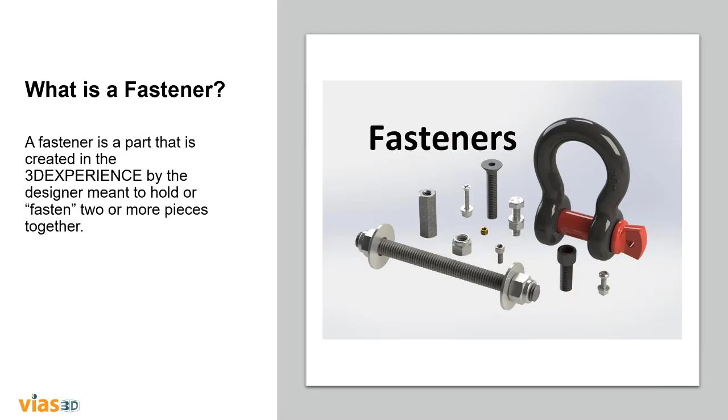As you can see, we have a set of bolts, screws, nuts, but we can have also rivets, and going further than that, we can have, for example, welds, adhesives, and different kinds of elements that join these 2 elements together. So let's take a look at what we can achieve on the 3D Experience by using fasteners. So first of all, we will use an application which is dedicated to design the fasteners across all industries.

It supports the modelization of different types of fasteners. As you can see, we can have single fasteners, a bundle of fasteners, and we can have bead fasteners. The technological view of fasteners can be defined to specify if the fastener is based on welds, bolts, modeling, etc.

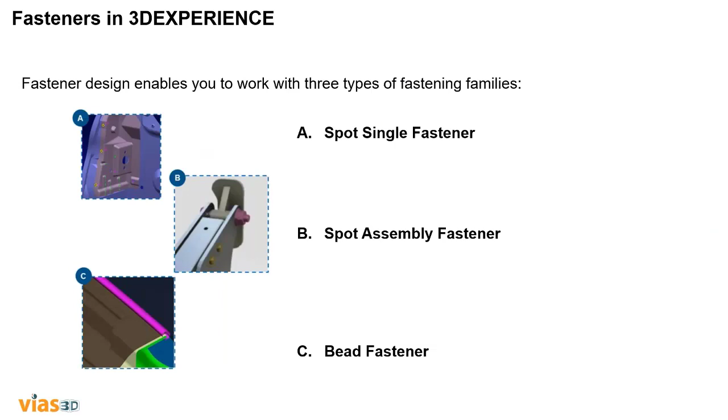Now, fastener design enables us to work with 3 types of fastening families. A single fastener that we call spot. This represents a single spot fastener. You can associate various fastening processes such as weld, adhesive, sealant, rivet, bolts, and clinch with these fasteners.

Okay, then we can have a set of fasteners, which is an assembly. This represents either an assembly of a bolt and a nut or a rivet, and you can control the shape of this fastener and all the fasteners together. A very important thing is the kind of geometry that we will use to create this assembly of fasteners, and that would be the skeleton, which is a wireframe geometry that could be a set of points in which we want to define our fasteners, or it could be a curve along which we want to create the fastener.

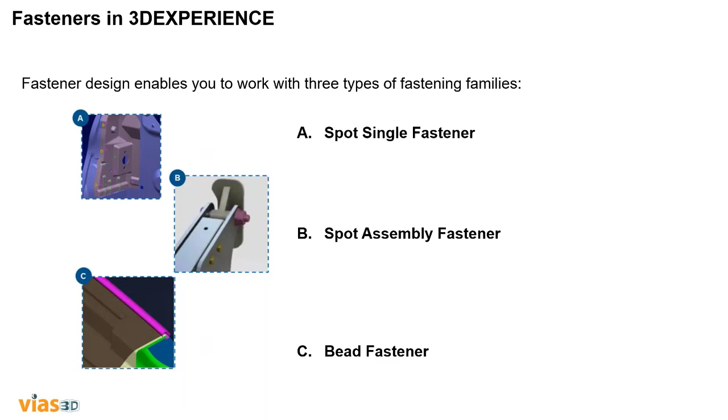And finally, we will have the bead fastener. This represents associating various fastening processes such as weld, adhesive, and sealant with this fastener. So this is what we can represent. For this, we will use a curve or a geometry, and we will put this fastener along it. Okay, so I will continue to a video.

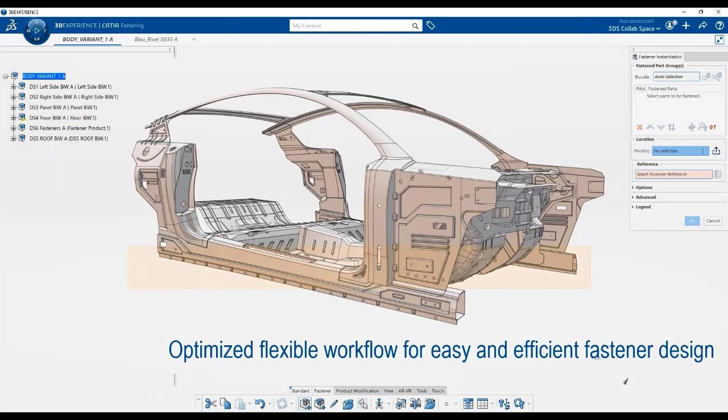Let me explain to you what we can achieve using the CATIA application, CATIA Fastening, inside the body fastener designer role, which is the one for transportation and mobility. So we can optimize a flexible workflow to easily define a set of fasteners. What you can see is that we got the skeleton defined, and we got the 3D parts that we may have from sheet metal design, or if you're working in a different industry, it may be composites, right?

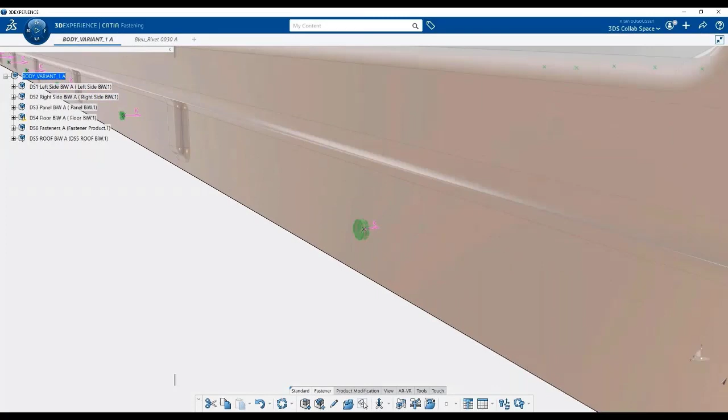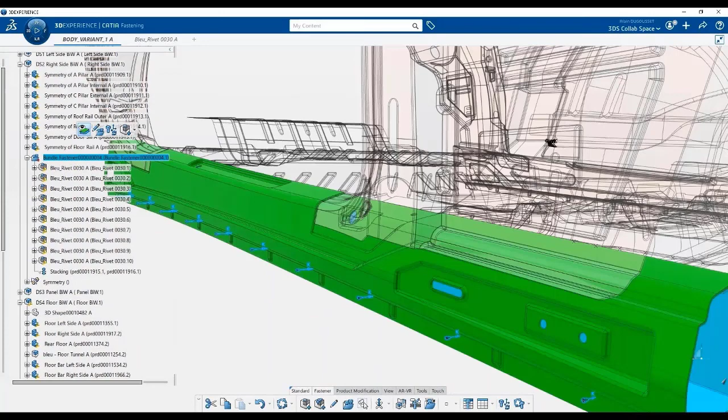So what we do is select this set of points, and we will get something called the key vector. The key vector is a vector that defines the position of the fastener. So we can go from a unitary fastener defined in a catalog to create this bundle of fasteners and position them automatically on our assembly. You can see how the parts involved will be used to define this set of fasteners.

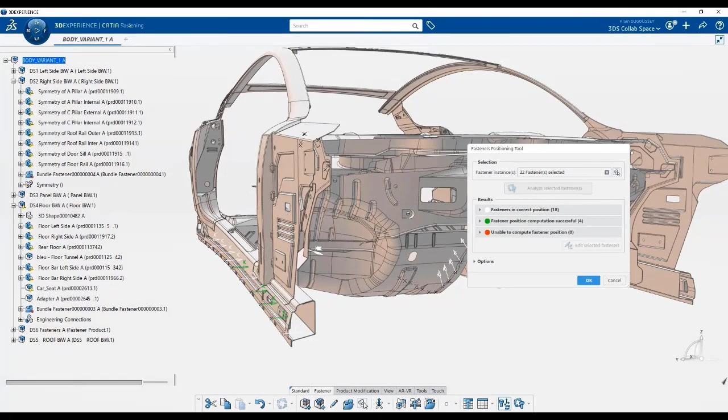We can then stack different kinds of fasteners from a catalog, and that's very important because that allows us to reuse the data. And finally, once we select that fastener from the catalog, what we will do is create all the entities into a single bundle on our operations tree. So that will be able to be handled very easily and very quickly.

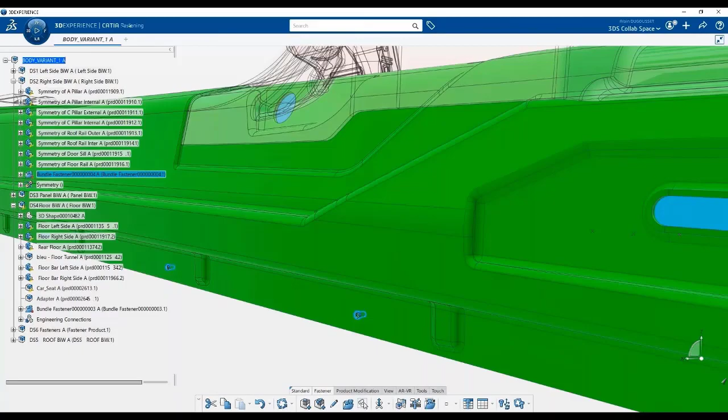You can see this process. What we are doing right now is positioning these fasteners on the right view. We select the parts involved. We got two for this case, the one in blue and the one in green. Okay, let me show you a different example now for a different industry. This one is the fastener designer role inside CATIA, but applied to the industrial equipment industry. Okay, so let's play this.

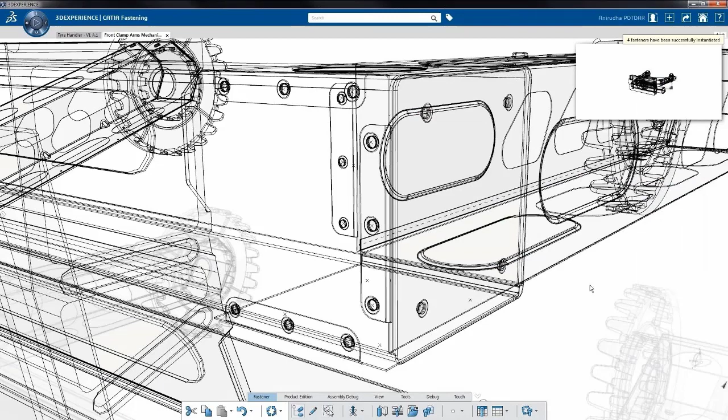Okay, so you may remember this example that we got in one of our previous classes. What we are doing here is positioning rivets on our sheet metal design, and this is a spot fastener. Okay, then what we do is select that spot fastener. All the characteristics may be in the catalog that we previously defined. So in this case, we will position these rivets.

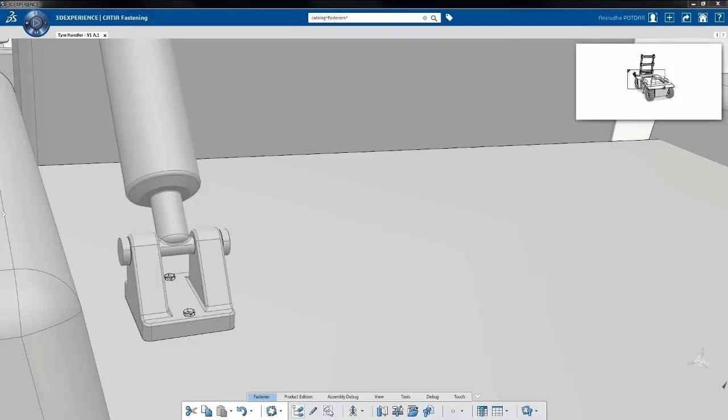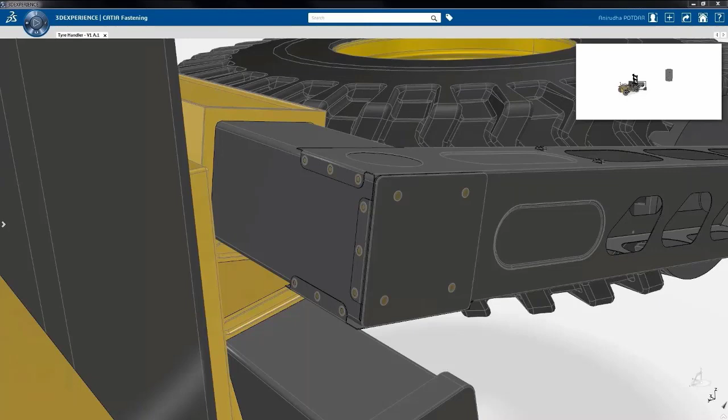And a very important thing is that we can position them by applying a set of rules. For example, in this case, this is a bolt. If you want to apply these fasteners along a curve, you can define the minimum distance between them or the maximum distance between them. And once you have instantiated all the objects in the design view, you can quickly generate reports. So that's a powerful tool that will give us all the information about the fasteners that we are creating in the 3D model. Okay, so I think that's it for the designer role.

Let me talk a little bit about the workflow example, how we can achieve this and how it can be integrated into your design process. So we've got several options. We can start from a legacy software such as CATIA V5.

We will have the root CATProduct, and that means we will have the 3D CATParts, which is all the structure, all the parts created, and then we will have our skeleton. That's important. That's the wireframe geometry that we will use to position all the fasteners. Okay, so we will usually come from composite design or sheet metal products.

Then we can import that native data. It could be V5, for example. This CATProduct, CATPart, we can import into the fasteners database in the 3DEXPERIENCE. Okay. Then using the fastener apps, we can create a template of flexible fasteners. That means we can create several bundles of fasteners to select among all the ones that we are using in one program, for example, and they will be adapted for stacking.

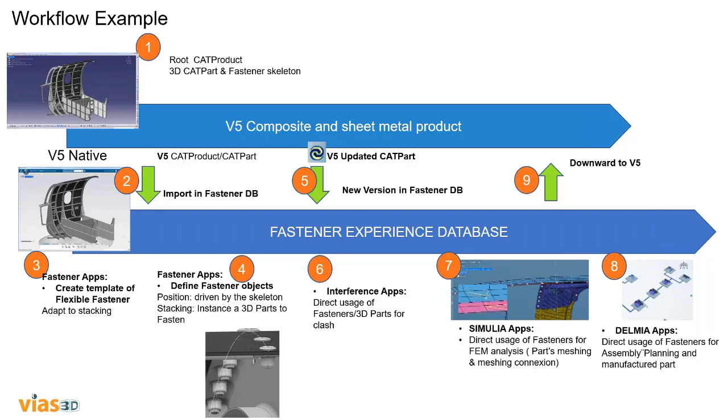Okay, great. And with that, we'll hand it over to Roberto. Roberto? Thank you, Adrian. Thank you, Glenn. Next slide, please, Adrian. Before we start the video, I just would like to make some comments before we go through the workflow.

So what Adrian just explained to us is more related to managing the product structure and the design aspect. And at some point, we might need to perform simulations, right? And the way we do the fastener installments will have a lot of impact on the structure behavior. So when we perform simulations with large assemblies, sometimes in the simulation domain, instantiating fasteners could be a tedious task.

So this fastener application from CATIA makes, I would say, the simulation analyst's life easier, because the simulation model can gather the fastener information from the product structure and create the necessary connections automatically with very minimal user intervention. Okay, so what we will see in this workflow is how simulation analysts and also non-simulation experts can perform simulations reusing the fastener data. So Adrian, can we start the video?

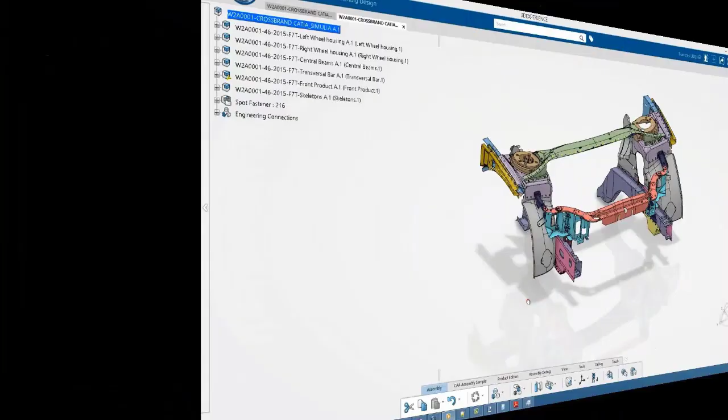Okay, so this is a workflow showing the collaboration between CATIA and SIMULIA applications. So the first step in this workflow will be the flexible fasteners installment on the product structure. At this point, the user is just defining the type of fasteners that will be instantiated in the assembly. By doing this task, the simulation model will be able to read what we're doing here and make the necessary connections for the simulation.

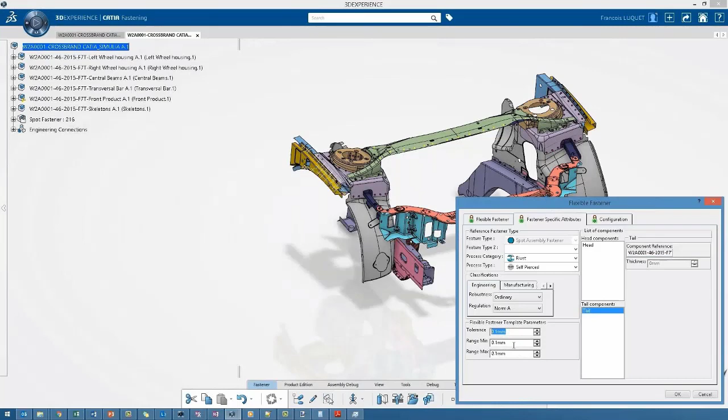In that way, our simulation model will better represent the real conditions of, in this case, the assembly for the transportation and mobility industry. So after doing this, the first step will be creating the simulation model that will represent the assembly. The first step will be creating some meshing rules.

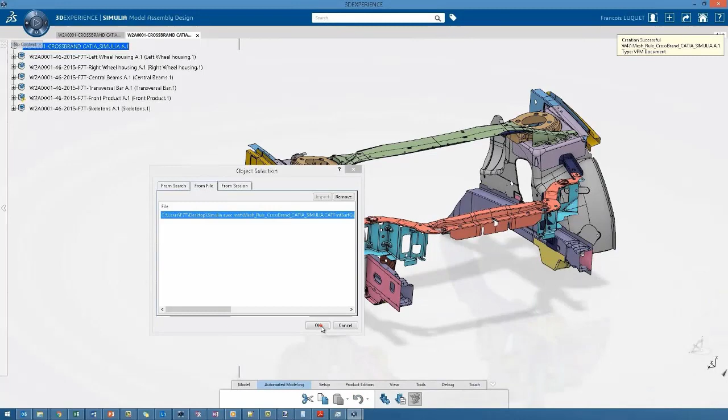Meshing rules is just about defining the meshing criteria to have a high quality finite element model. Meshing rules is just a set of, I would say, conditions that will measure the element quality. One of the main goals of using these meshing rules is because we are going to generate the entire finite element model of this assembly automatically with minimal user intervention.

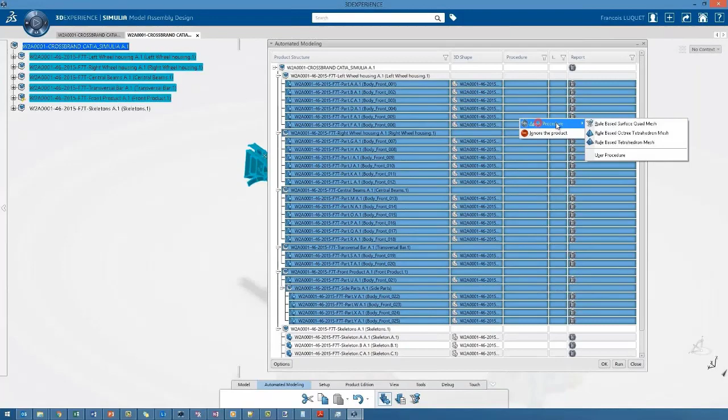So in order to do this, we have to tell the Simulia application under which conditions the application will build the mesh of the entire assembly. Right now, we're just defining to which components the meshing rules will apply. We're just defining the meshing rule definition and also

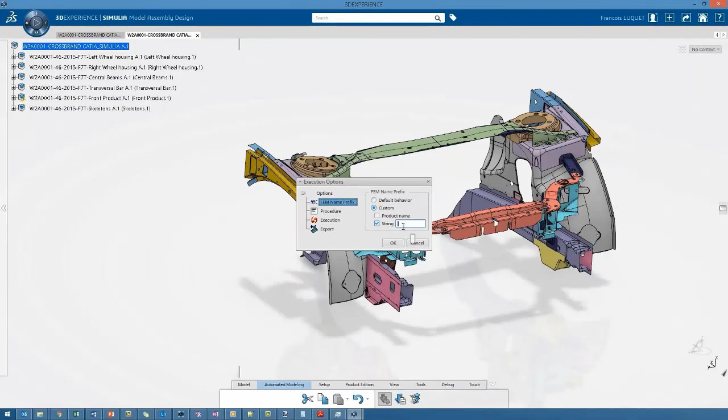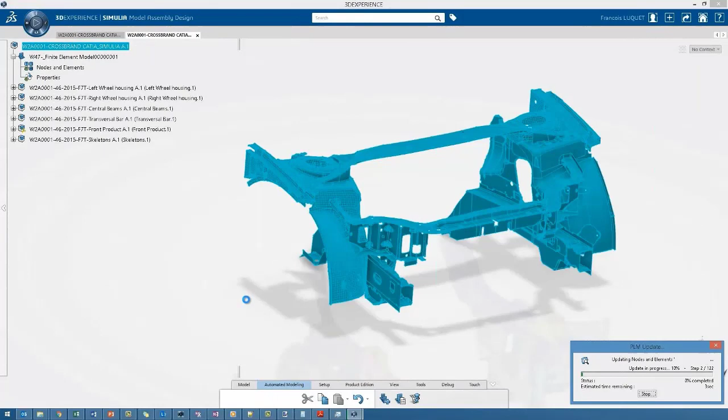how the execution will be performed, because this will mesh automatically the entire assembly, and we can also use hardware resources, not just our computer, but also remote hardware. That's also possible, and we can also define the number of threads available in the hardware to automatically create the mesh. After doing this, we just have to update the product structure, and the simulation model will be created automatically. As you can see, the meshes are being created automatically.

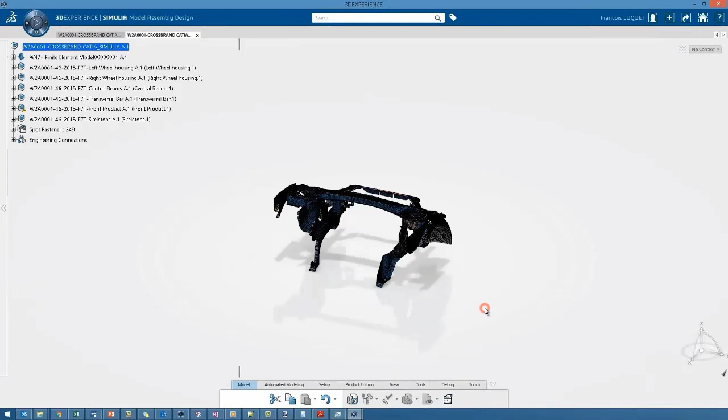So right now, we just have the FEA model defined under the product structure. We're just visualizing the shell mesh that has been created. Next step will be reusing the previously defined fastener data, so the finite element model will be able to read it and create the necessary connections automatically.

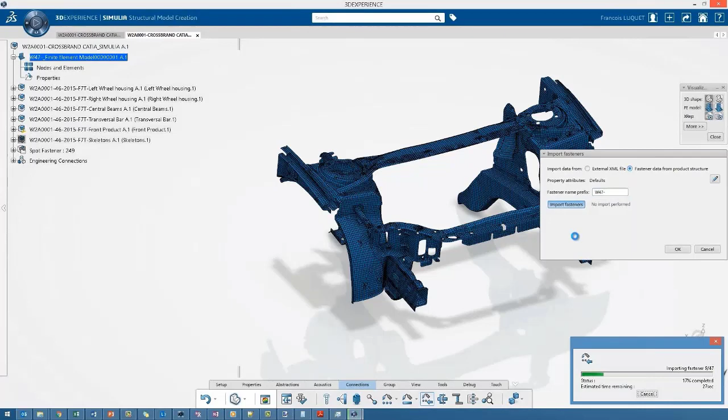So right now we're under the Simulia app, and we're just selecting the import fasteners command and reading the fastener data from the product structure. And as you can see, all the yellow points that we're looking at are coming from the fastener data created from the fastener application. In this way, we're defining the

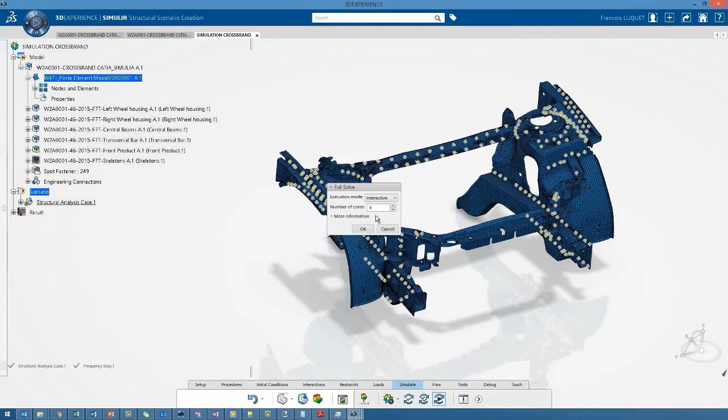connections in the finite element model, and we will run an example frequency simulation considering these connections. During this workflow, we will explore different configurations of this simulation, and we will be basically changing the fastener data to see the effect of this data in the simulation results. So after performing the frequency simulation, we will be able to see the mode shapes

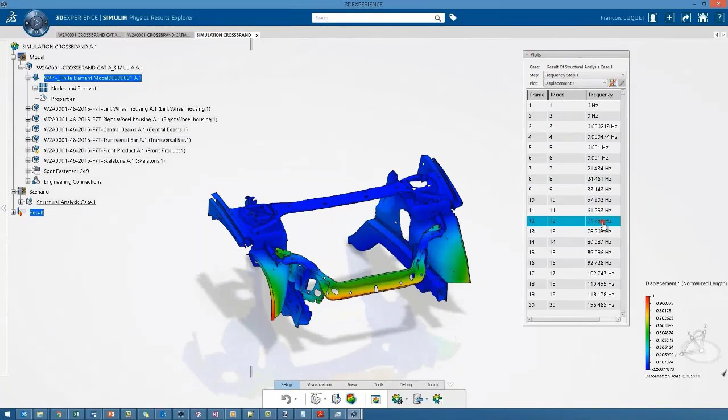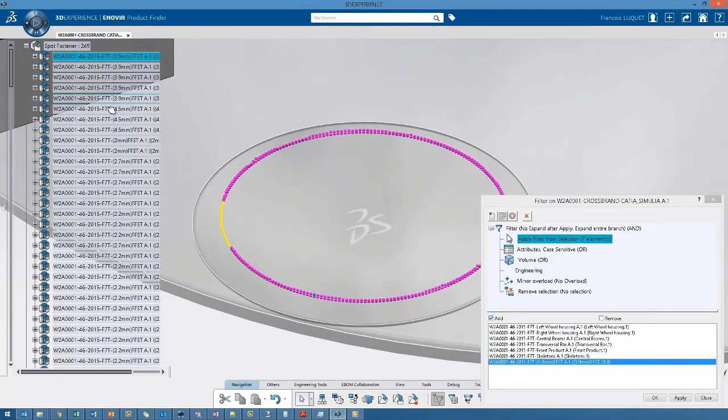at different frequency levels. And by seeing these results, we can see that at some frequency levels, the structure is having some unexpected deformations, and this is due to the lack of fasteners. So very easily, we can go back to the product structure, edit our fastener data, update the simulation model and rerun the simulation again, with no manual user intervention to define the fastener position at the simulation level.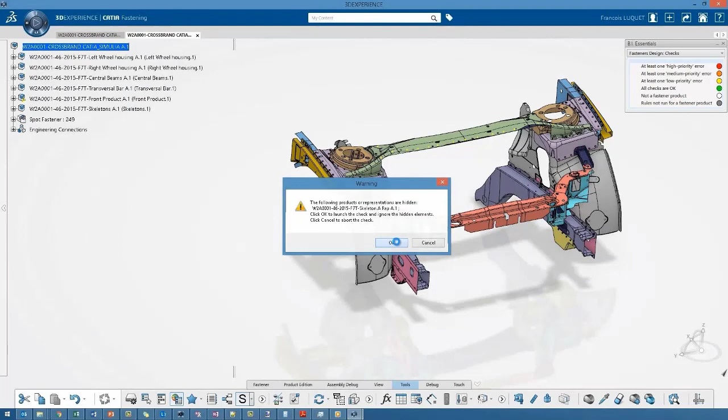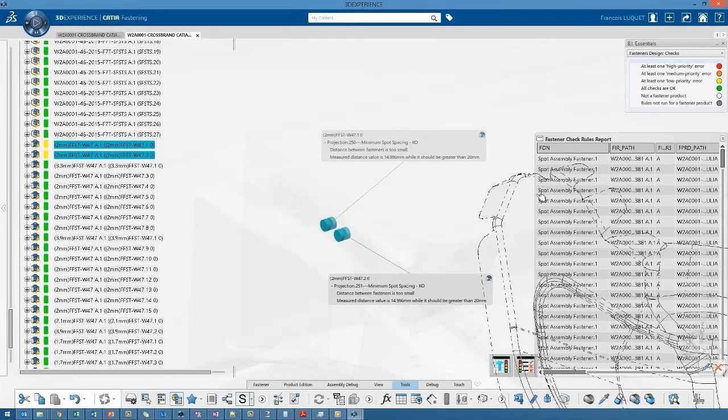So in this case, the first thing we're going to do is diagnose the fastener data. I think Adrian mentioned before, we can define the minimum distance between fasteners, and if we are not fulfilling these conditions, the fastener data will not be read in the simulation model. So in this example, we are not in compliance with this. These fasteners are very close. So the user will just modify the distance between these two fasteners.

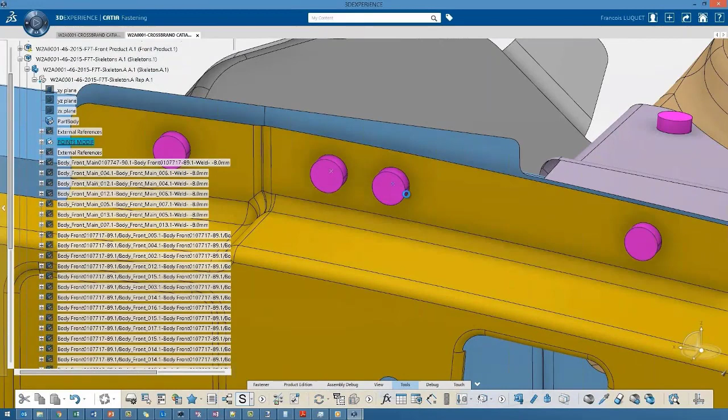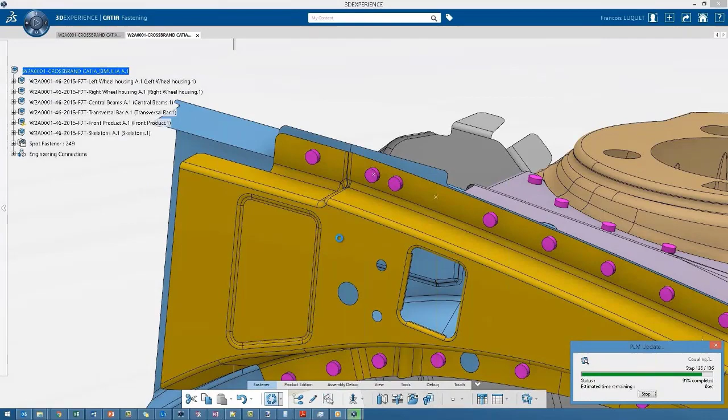We just have to go to the wired data that Adrian just explained to us. We will measure the distance in this wired data, and just by modifying the distance, the fastener data from the product structure will be automatically updated, and so will the simulation model. By working in this 3DEXPERIENCE environment, this allows us to work with real-time data using PLM objects. So after updating the fastener data, we just have to go back and update the simulation model using the new fastener data.

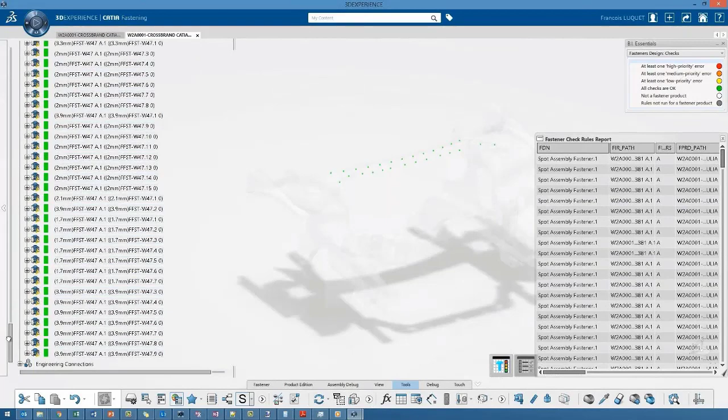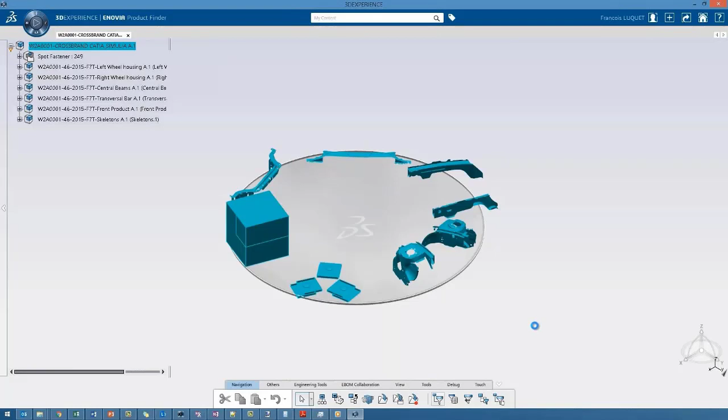With the update, we're just checking the new fastener data, and the green color next to every fastener means that they are okay with the fastener installation conditions. So right now we're just saving the model, and we will go back to the simulation model, update it, and the new connector will be automatically placed in the assembly.

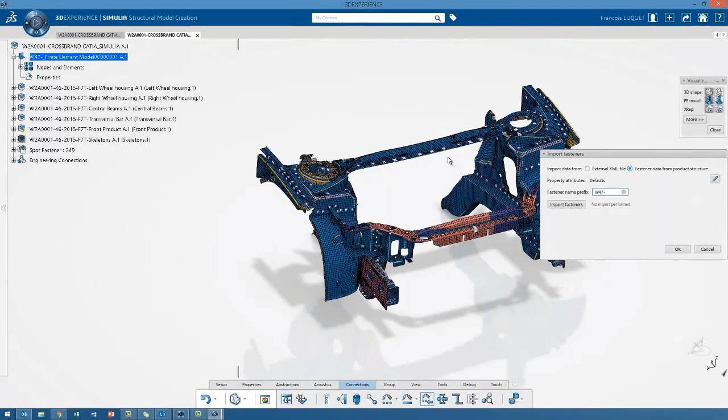Okay. We just have to perform the update, and we will see in the left side of the assembly the two connectors very close to each other. We just have to update the new fastener data, as you can see here. We import the fasteners again, perform the update in the simulation model, and you'll see that now these two connectors are positioned as expected. And then we can just rerun the same simulation again.

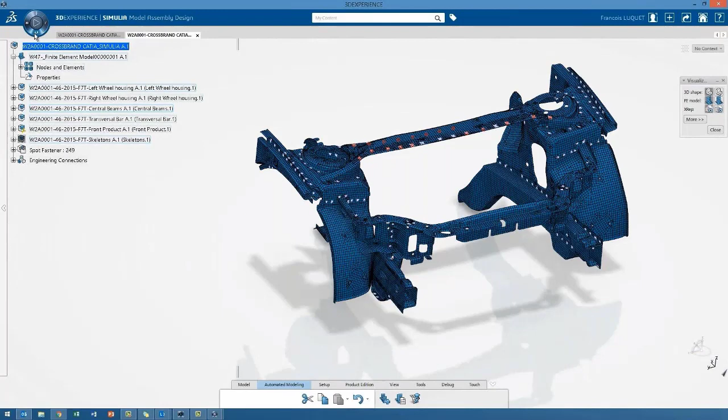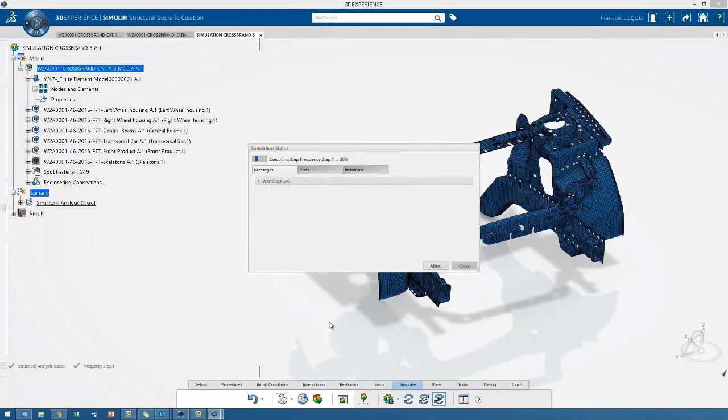As you can see, until now, there is no manual definition of connectors. Of course, that can be done, but when we're working with these large assemblies, it could be a very time-consuming task. So by using the product structure data, we can really save a lot of time. Right now, we're just running the simulation again. And after running the simulation, we will again check the frequency levels at different deformed shapes.

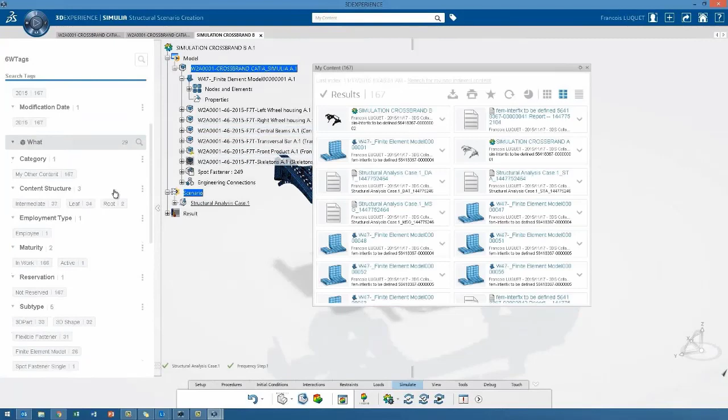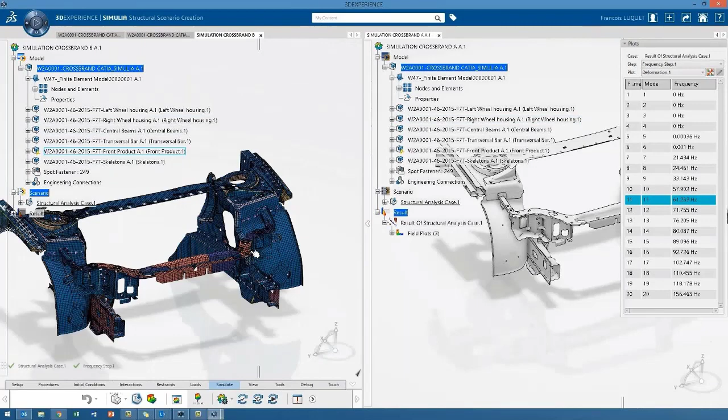We'll still have some undesired deformation on this model. We will go back to the product structure data and perform the necessary changes to the fasteners. Before we go to that step, we will just make a comparison between the previous simulation and the new simulation. In this way, we will be able to see how the new fastener data is impacting the simulation results.

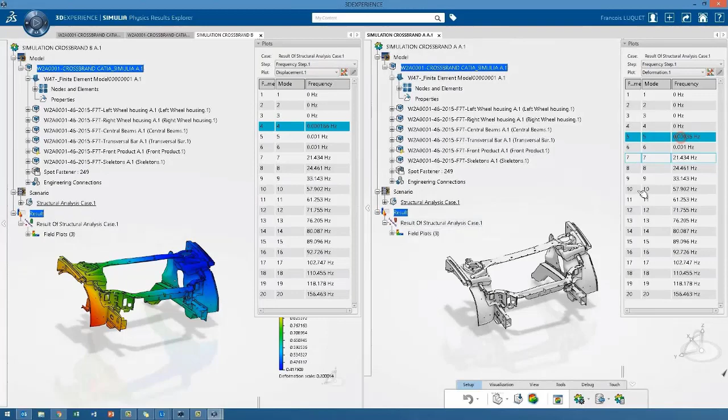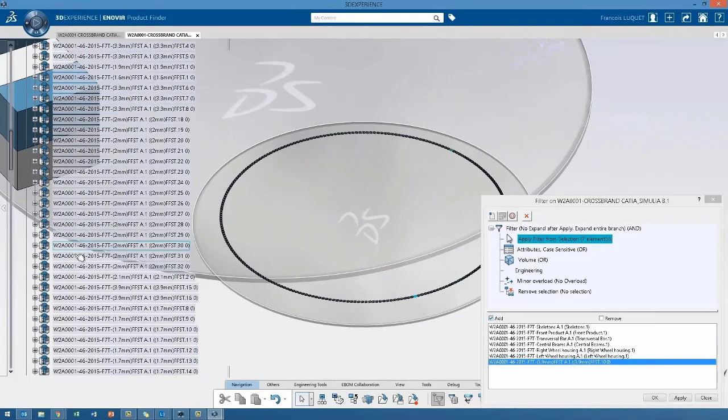As we can see in the different models, there is a minimal impact of the new fastener position on the frequency levels. We have basically the same frequency at the same mode numbers. So this means we still have to do corrections to the connections. Instead of manually editing the connections on the simulation model, which of course can be done, in order to keep the product structure data updated, we will go back to the fasteners design and perform the necessary changes.

Right now, we will be using a new set of fasteners, and we'll apply this to the product structure. We will include a different set of fasteners in different regions. Right now, we're just opening the new fastener data. We just have to open this at the simulation model level, perform the necessary updates, and the model will be ready for the next simulation.

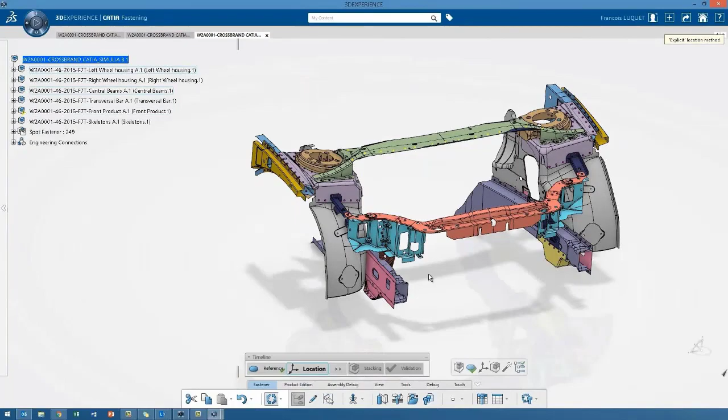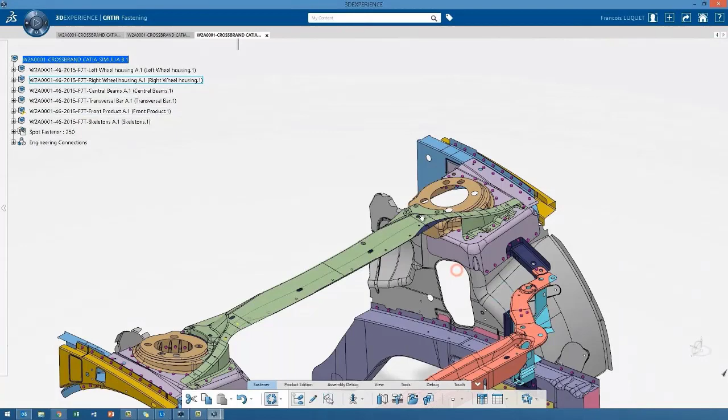So we will include a new couple of fasteners in these regions. As you can see here, we're just placing the wireframe data and including the new fastener here. The same will be done on the right side of the model. A new fastener will be placed here just by selecting and defining the new wireframe data. We're okay with this new fastener.

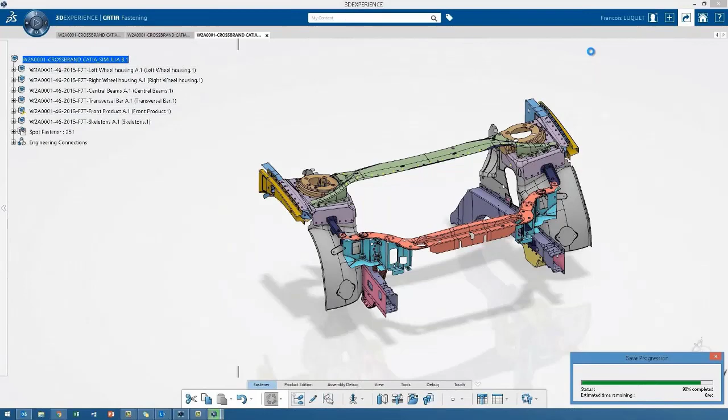And the next step will be, we will just need to update the product structure and go back to the simulation. The simulation model will be able to update and read the new fastener data, and the connections will be there, ready for the new simulation.

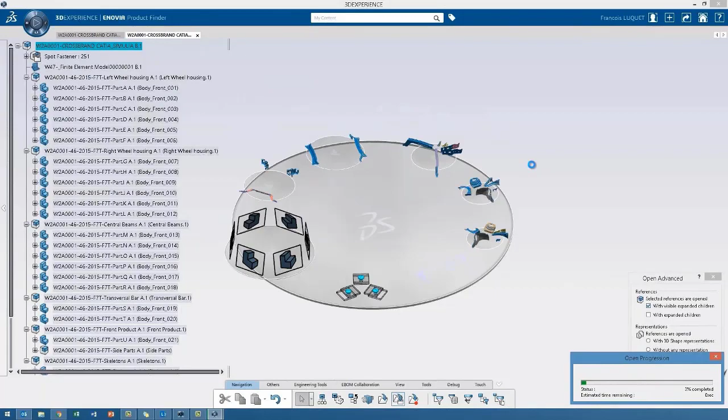Adrian, can you help me just moving forward the video? Like, no, just a couple minutes.

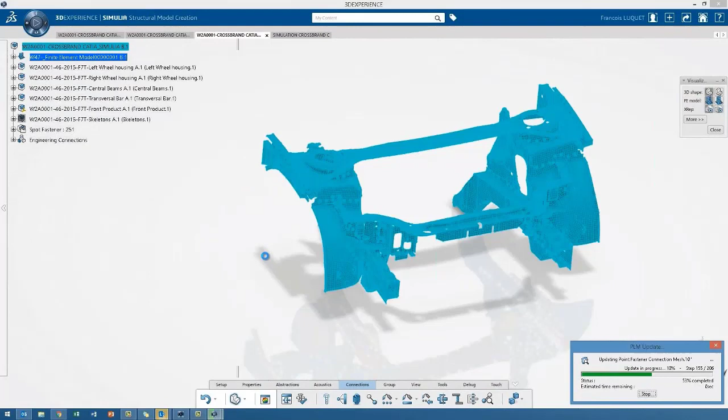Yeah, that's okay. Okay, so now as you can see, there is the new fastener data in the simulation model where we just read the new fasteners. And by just updating the structure, I think I've said this many times now, we can run the simulation again. After doing these steps, we compare the new simulation results, and in this way we will be able to measure the impact of these new fasteners on the mode shape.

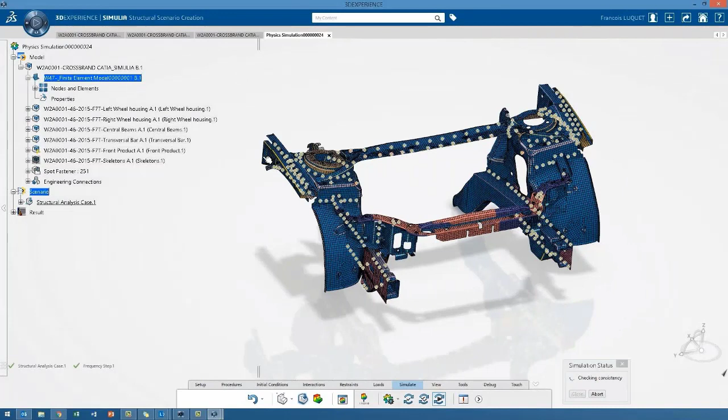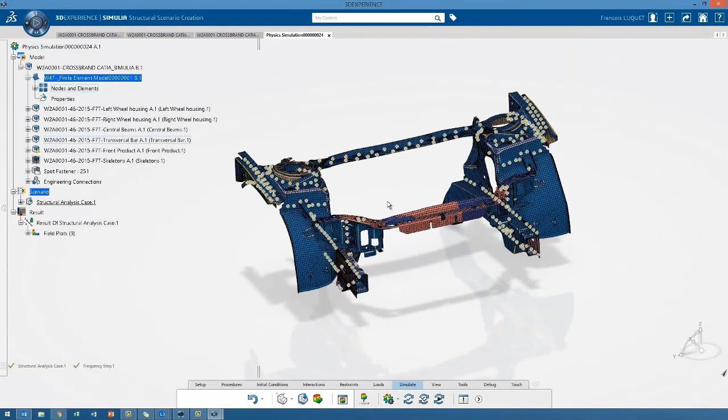We just define a new frequency response analysis, 20 modes, defining the number of cores to be used. Now we have the results. We're just looking at the new frequency levels at different deformed shapes. As you can see until now, it is very easy to use updated fastener data on this. The same will happen if we perform changes to the CAD. The focus today is the fastener data.

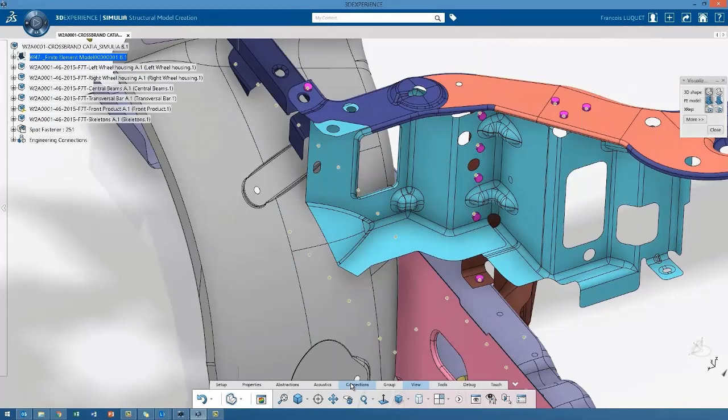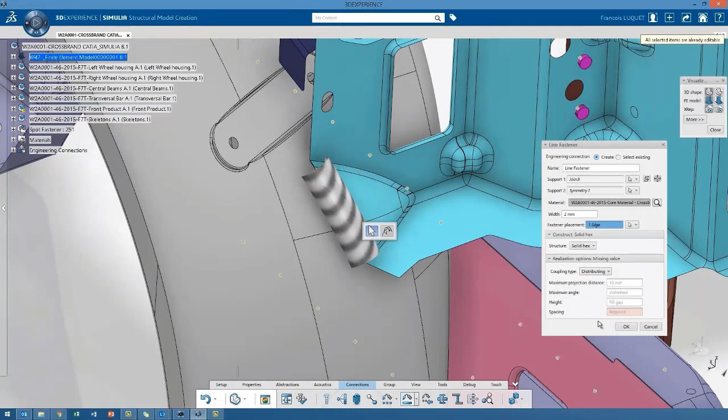And now we will use a different example: not just point fasteners, we will use line fasteners. So in this case, we are representing some kind of seam welds. We can define the type of material to be used in this seam weld, the size, and which kind of elements we want to use for the simulation model. This is at the fastener data level. After defining these new fasteners, the simulation model will update automatically.

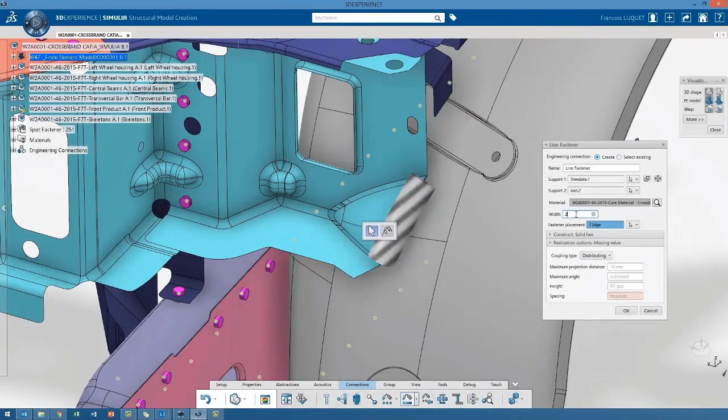We'll see here, we're just defining the new material, the size of the bead fastener, and the spacing that will be used here. After doing this, we just go back to the simulation model, update the simulation model, and now the bead fastener is well represented here.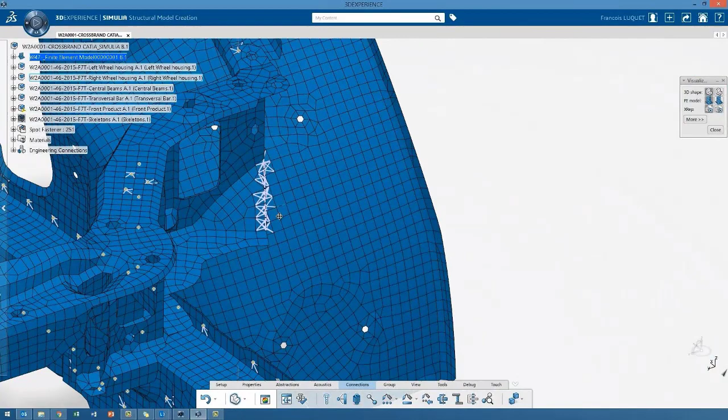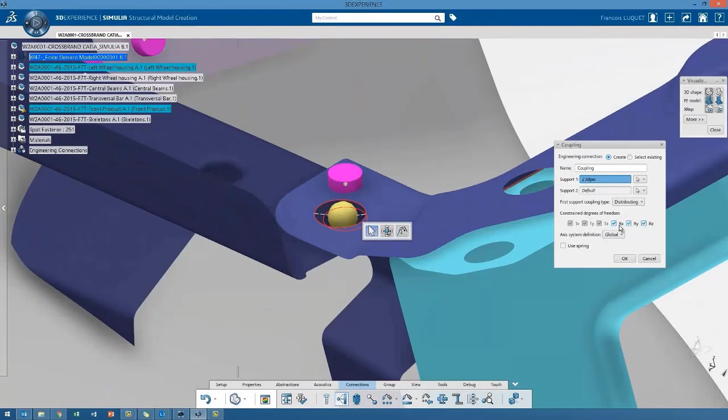This is an example of adding manual connectors on the simulation model. This is not part of the fastener data structure; this is at the simulation level. These are just rigid connections to improve the frequency levels for the simulation.

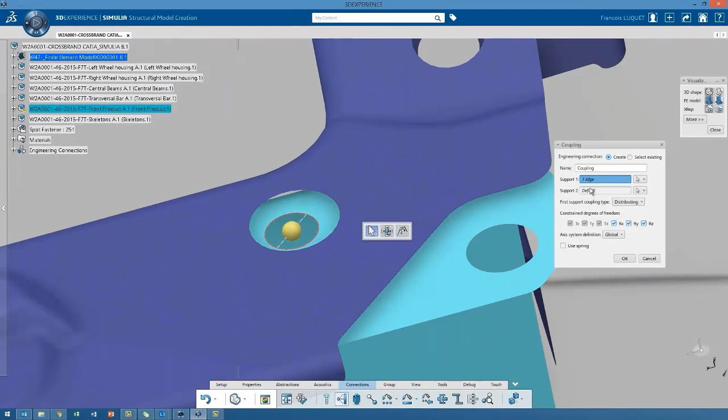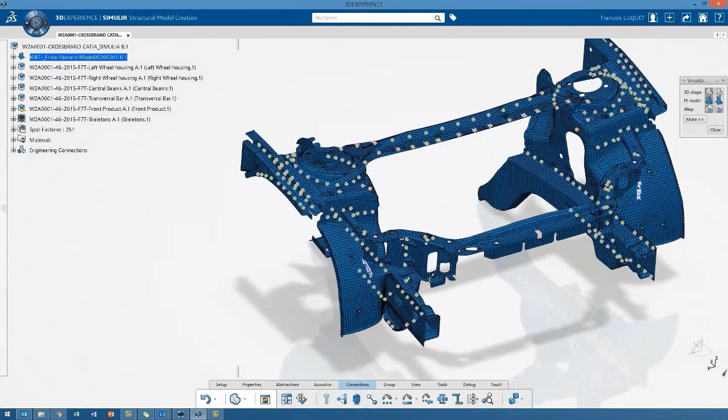The fasteners imported from the product structure have a flexible behavior, and this is the main difference with these connectors. These connectors have just rigid behavior, so we're adding some stiffness to the assembly. Okay, this is ready. We just have to rerun the simulation again. The connectors are updated, and we can continue with the simulation execution.

After executing the simulation, we will be able to compare the simulation results of the previous configurations and the improved configuration. And we will see that the frequency levels are much higher compared to the previous configuration.

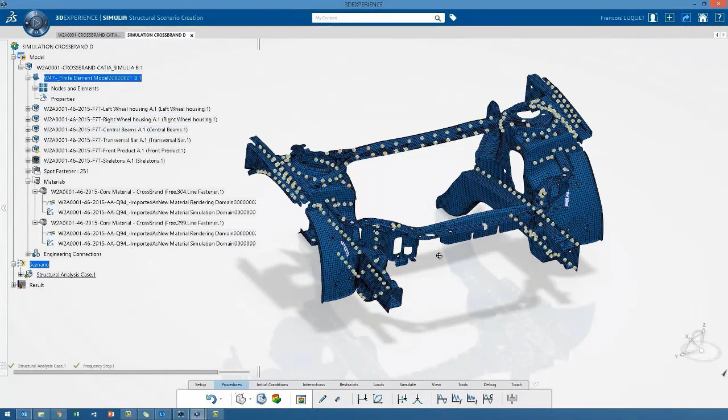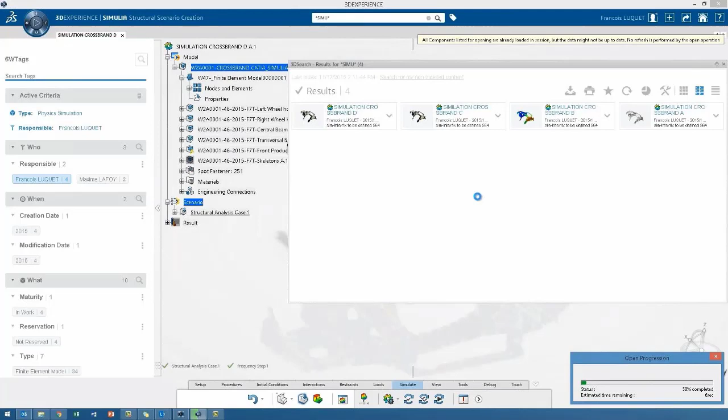So this is the result. I wanted to mention that in CATIA, Simulia, and Delmia applications, most of the parameters you put in can be added as parameters. So in the future, when you build these processes and do optimization or studies, all of the functions, even in the Fastener app, you can use parameters for. I thought I'd throw that in there, Roberto. Yeah, that's correct.

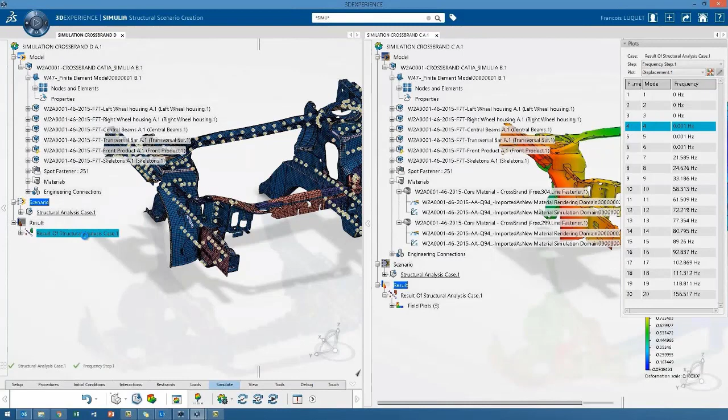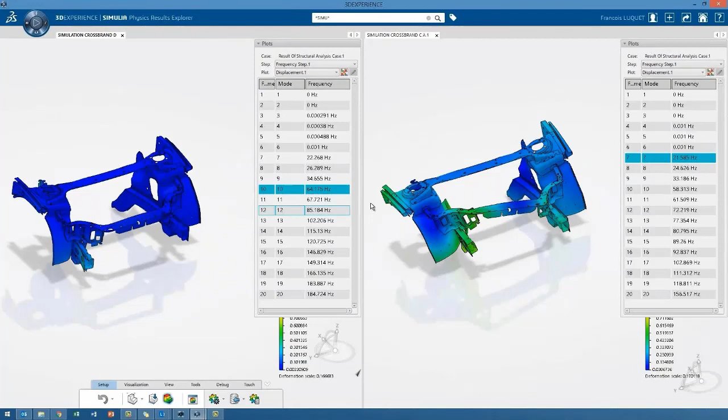Okay, the final step is to compare the simulation results with the improved connections and the previous configurations. We'll see that the frequency levels are higher at the same mode numbers, as expected - that was our target. The simulation frequency levels are higher compared to the previous configuration, and we are getting the expected deformed shapes. Everything is now connected. With this, I will finish my intervention. Thank you.

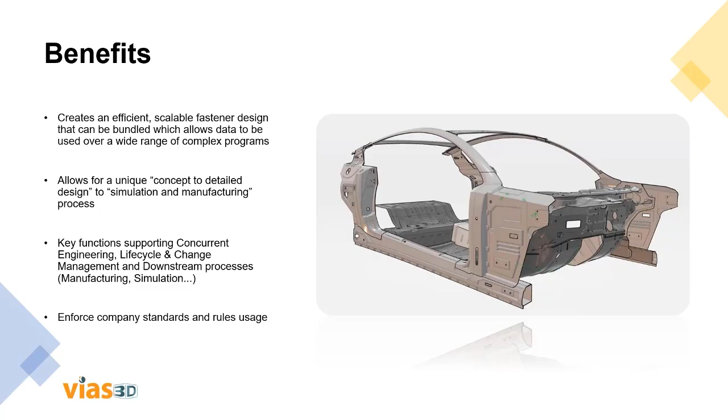Finally, you can enforce your company's standards and rules usage by defining these parameters that Glenn mentioned, by creating your own catalogs of fastener elements. You can quickly call these, apply these standards, and apply these rules into your design processes. So, that would be it for this.